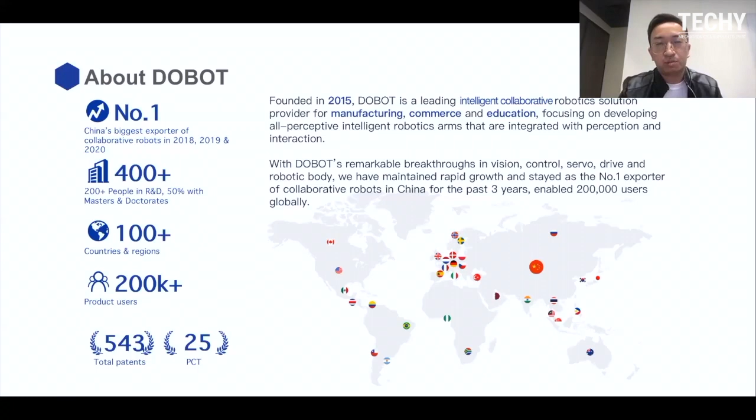Now I'm going to introduce a little bit about Dobot. Dobot was founded in 2015, and Dobot is a leading intelligent collaborative robot solution provider for manufacturing, commerce, and education. We are a team of about 400 employees, 50% of which are dedicated to research and development. In the last 3 years, we have become China's biggest exporter for collaborative robots, and we have sold our robots to over 100 countries and regions, served more than 200,000 users. We value technology and research a lot, and we have total patents of more than 500, and also 25 PCT.

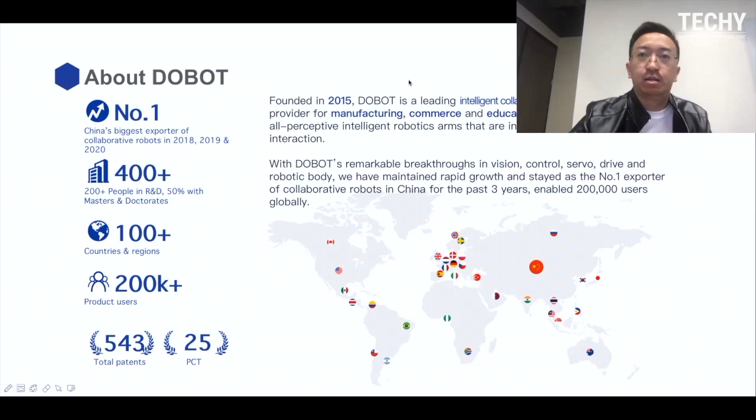Here is the product history of our company.

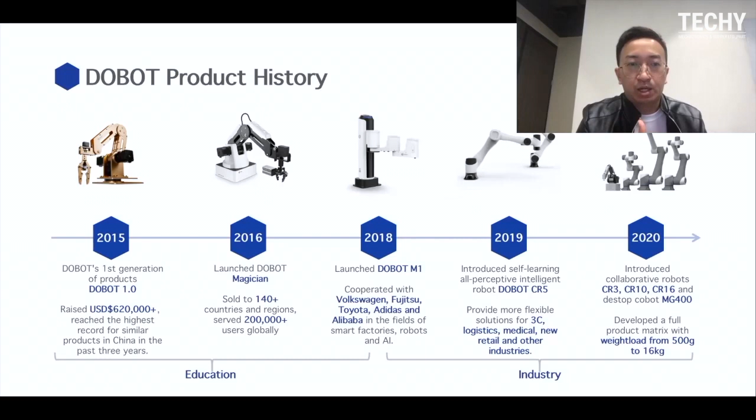In 2015, with the idea of bringing robots to more people, not only in industrial or manufacturing but for applications in other areas as well, we launched our first product, the Dobot 1.0, on Kickstarter, a United States crowdfunding website, and we raised 620,000 US dollars. After that, we began our journey developing more robots. In 2016, we launched our first robot, Dobot Magician, one of our most successful products, sold to over 140 countries around the world.

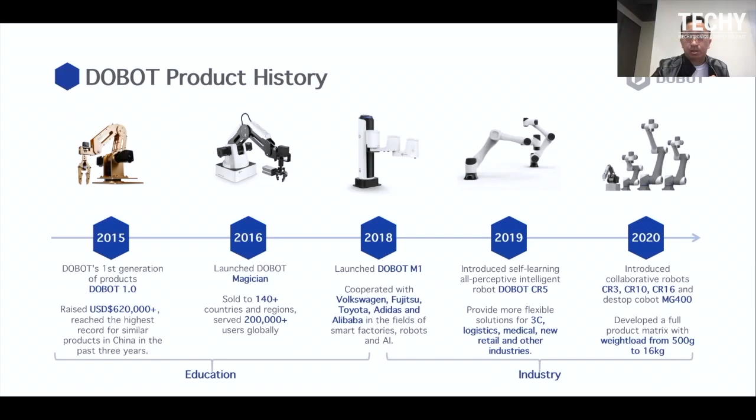After that, our company grew very fast and a lot of people joined. We started to develop more professional collaborative robots. In 2018, we launched the Dobot M1. After that, we had the Dobot CR5 in 2019. Last year we had the Dobot MG400 and also the CR3, CR10, CR16, etc. We also developed the Dobot M1 Pro last year. That's our product history.

In the past few years, some well-known companies have become users of Dobot robots, such as Toyota, Volkswagen, Foxconn, Sony, Samsung, and etc. We developed those robots because there are problems we want to solve for manufacturers. First is the rising competition - automation is almost everywhere today, and in this rising competition we need to further reduce manufacturing cost and stay ahead while improving product quality at the same time.

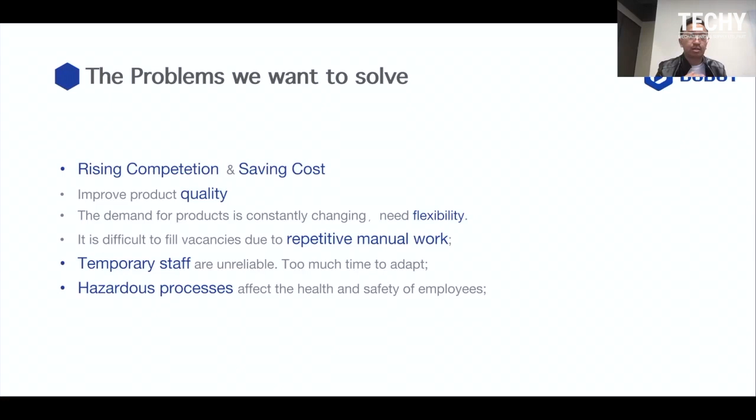The demand for products is constantly changing, and we need a flexible production line to adapt to new products. We also find it's difficult to fill vacancies due to repetitive manual work. We also face this same problem in China for our own factory, because temporary staff change a lot, are very unreliable, and take too much time to adapt. Sometimes the hazardous process also affects the health and safety of employees. Those are the problems we're facing in manufacturing today, and we want a better solution for that.

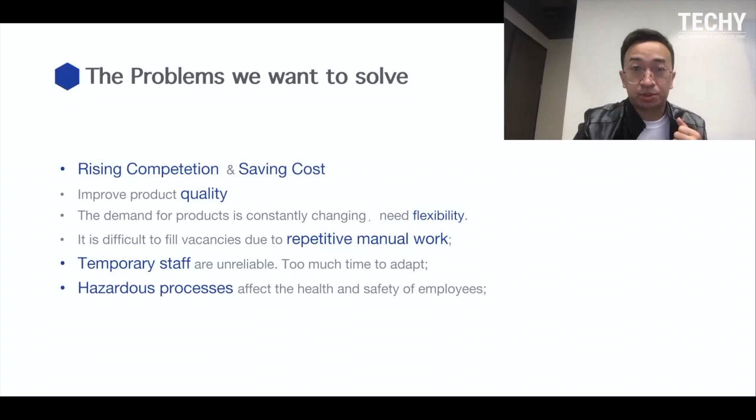We also have some special challenges during these COVID times. The first is rising labor cost, because labor cost is a big part of total industrial operating cost. The automation of industry has become a notable method to counter rising wages and workforce aging. In this case, we need a flexible solution.

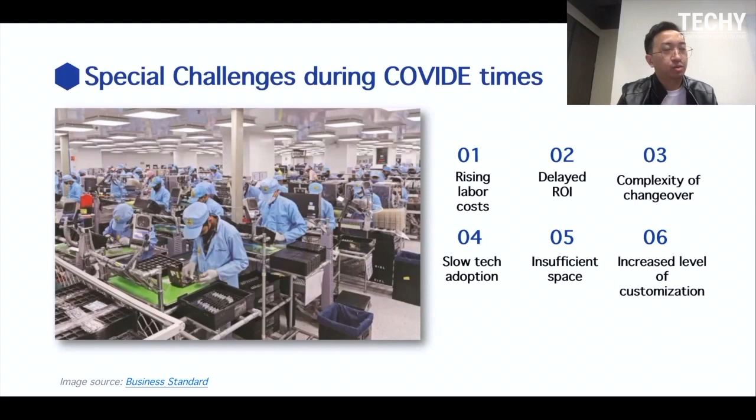That's our robot. We also may have other solutions, like non-standardized or customized machines for special purposes, but you'll find when the product changes, your specialized machine cannot be used for the new production process. But robots have very good flexibility to adapt to the product.

Second is the delayed ROI. In the long term, robots prove to be a significant value-addition by providing several advantages over manual labor in terms of operating cost and productivity. But the initial cost may be a little higher, especially for industrial robots - very high initial cost. But compared to that, the collaborative robot is much cheaper, and the ROI looks much better.

The third one is complexity of changeover. Today, the product changes very quickly. Maybe this month you have one type of product, maybe next month or three months later you need to produce a new type of product, and you need to change the production line for that process. Therefore, fast deployment and changeover automated production line is needed in fast-growing manufacturing companies.

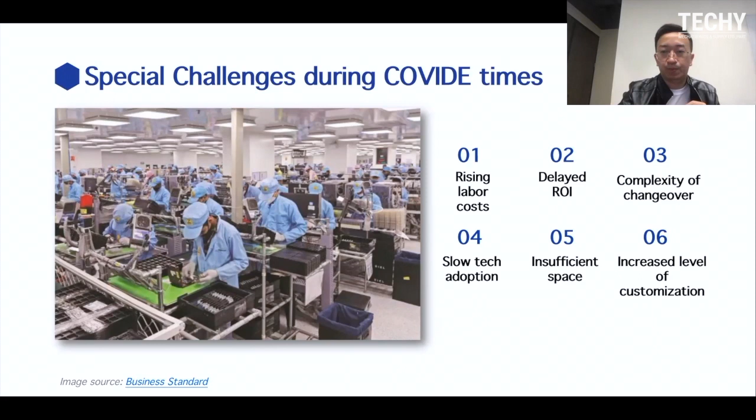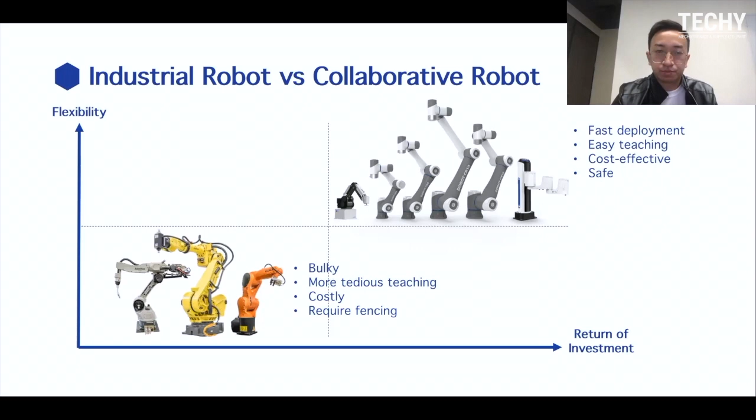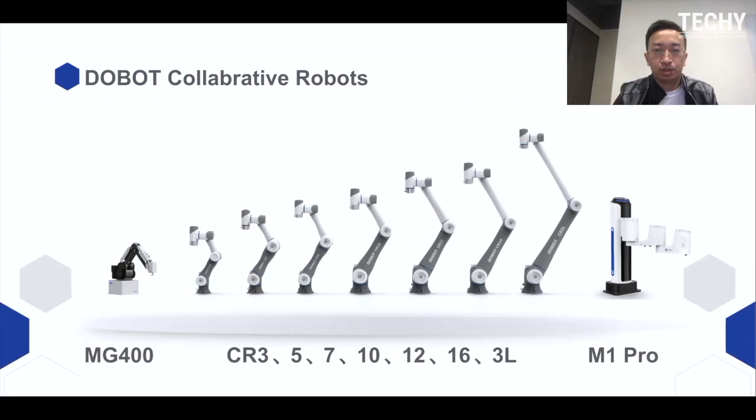Here is our Dobot collaborative robot lineup, from the Dobot MG400 to the CR series and also the M1. Our collaborative robots are designed to satisfy different application scenarios such as screw driving, assembly parts, and machine tending, where lots of human labor is required.

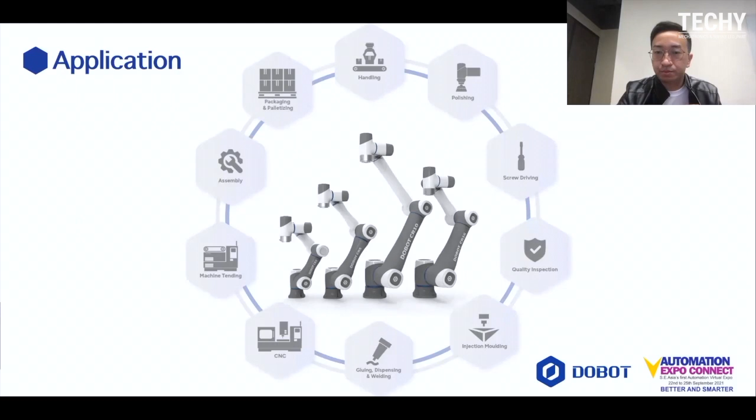So why Dobot? What can we provide to our customers and what value can we offer? I'm going to talk through several points. The first one: we have a product series of different types covering from 0.5 kilo to 16 kilo payload, and we regard safety, ease of use, and quality assurance as the most important product features.

In the past few years, we have been continuously investing in robot technology, such as mechanical design, controller algorithms, and software. We believe we can provide our customers with competitive products to solve customers' problems, improve production efficiency, and save cost. In addition, our partners in automation, such as computer vision and grippers, can make the use of the robots faster and more convenient.

Here are some product series of our robots covering different payloads and work ranges. Some are targeted at small object operation, for example for 3C and electronics companies, and some are designed for applications with heavy payload or big end effectors. We also have a special model like the CR3L, which targets small weight for big range, for example for CNC and other applications. For our customers, you can choose the right one for your specific task to reach the best price and performance ratio.

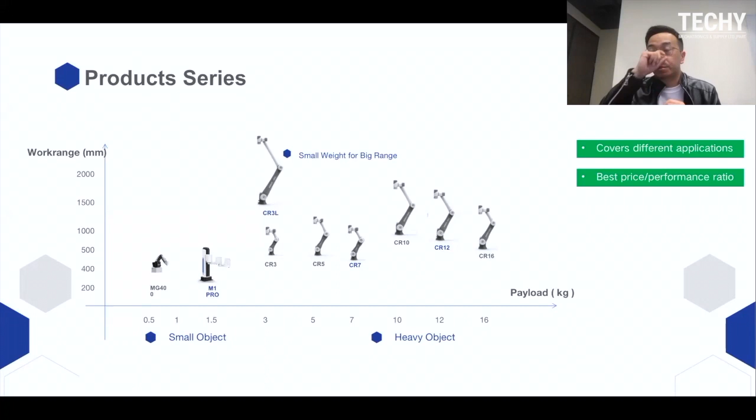Safety is also very important for robots, especially when you want the robot to work side by side with people. At Dobot, we have two advanced technologies for safety. One is called safe skin, the other is called collision detection.

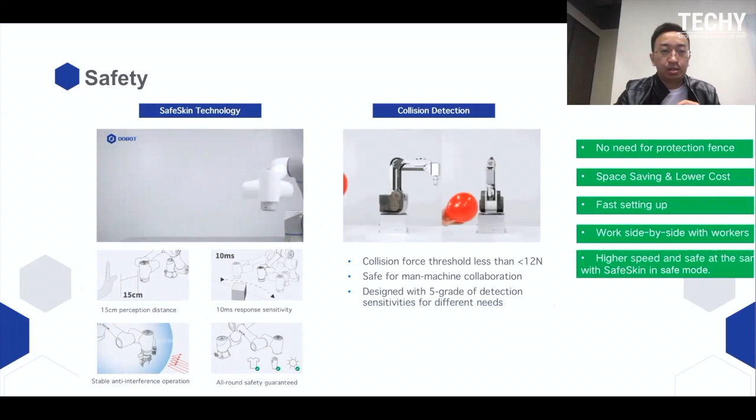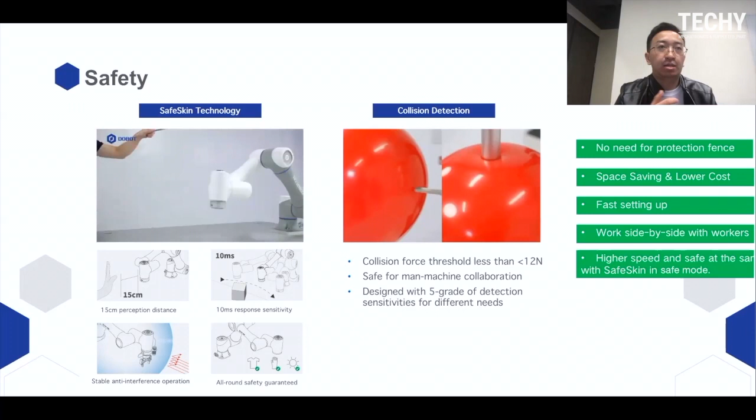The safe skin is a non-contact technology for human detection before the robot touches people, and it can sense there is an obstacle on its trajectory and stop immediately. It has a 15 centimeter perception distance and 10 millisecond response sensitivity, and is stable and anti-interference in operation. It covers the whole body of the robot arm, so no matter which direction you approach, the robot will sense there is something and stop immediately.

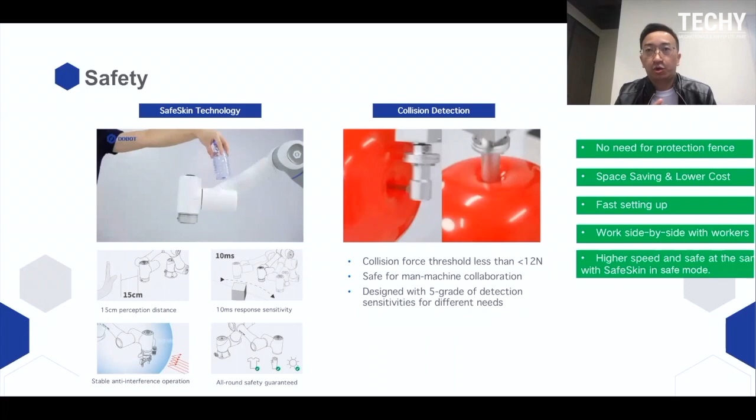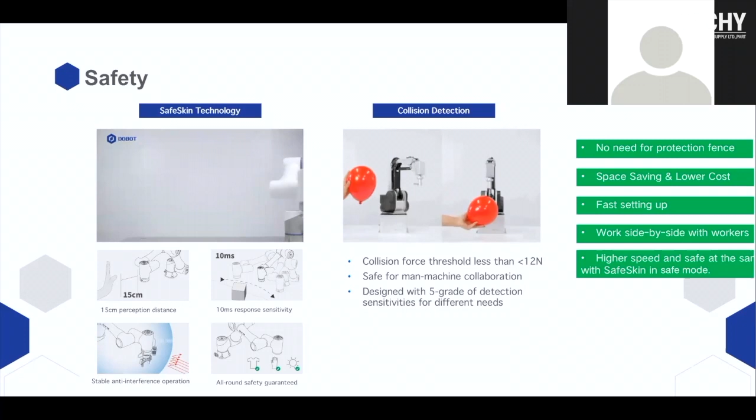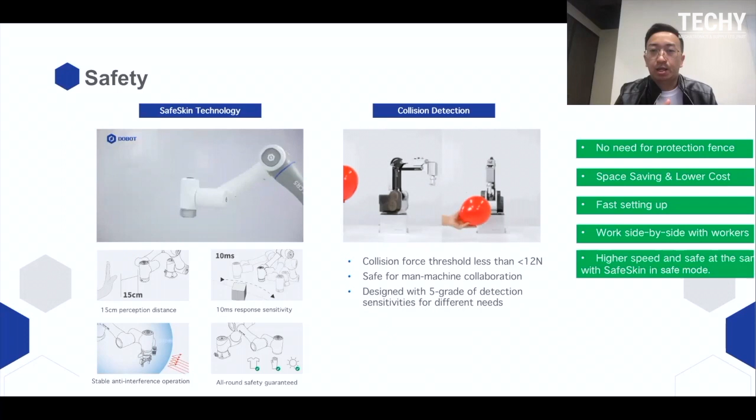We also have collision detection, especially for our small robots, and the collision force threshold is less than 12 Newton, which is very safe for man-machine collaboration. Safety is not only about protecting our workers, but it also means less space requirement for the protection fence, which can lower that part of the cost.

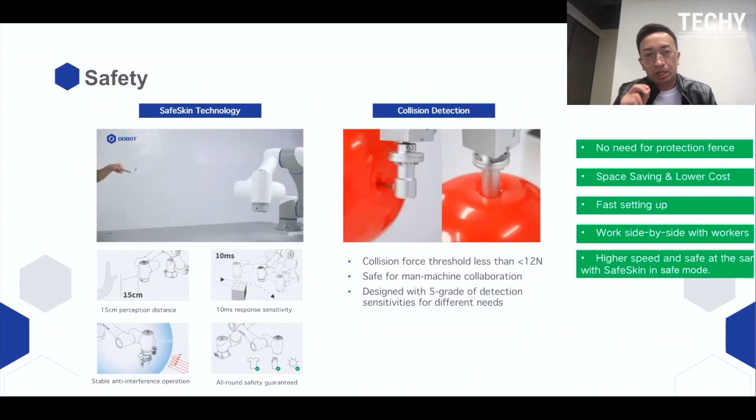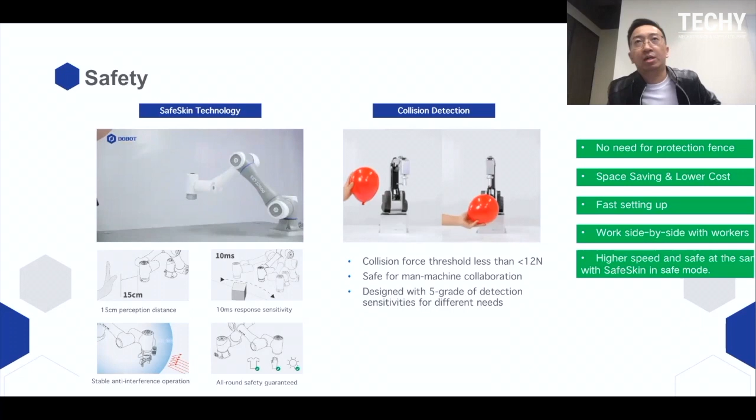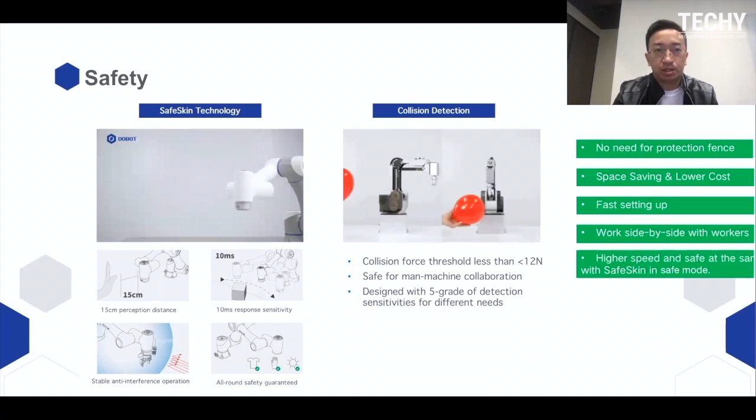With our safe skin technology, the robot can be set up fast, and especially with safe skin, the robot can run at a much faster speed when it's in safe mode. For maybe some other companies with other collision detection technology, when the robot works in safe mode the working speed is reduced to like 50% or 75%, but with safe skin technology we maximize the speed, which also means greater production efficiency.

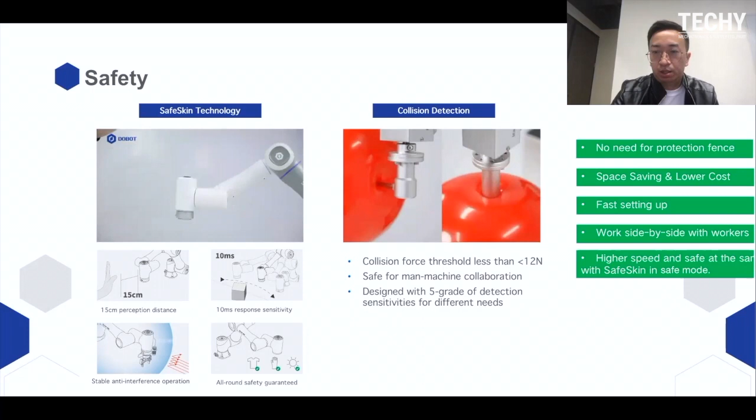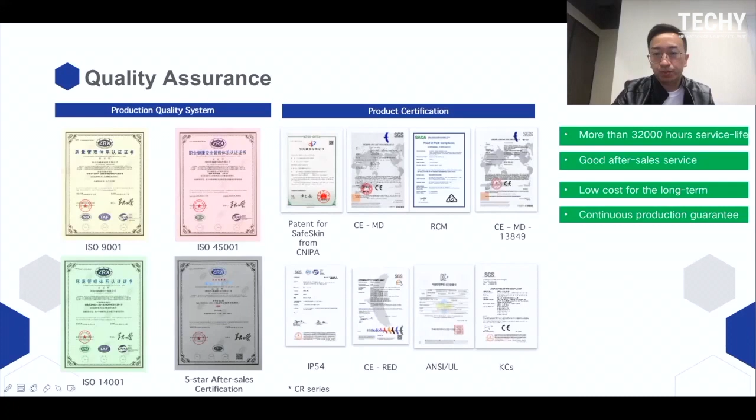And we want to have more people use our robot, so we have spent a lot of time to make the robot easy to use. The first one, we have our Dobot Studio.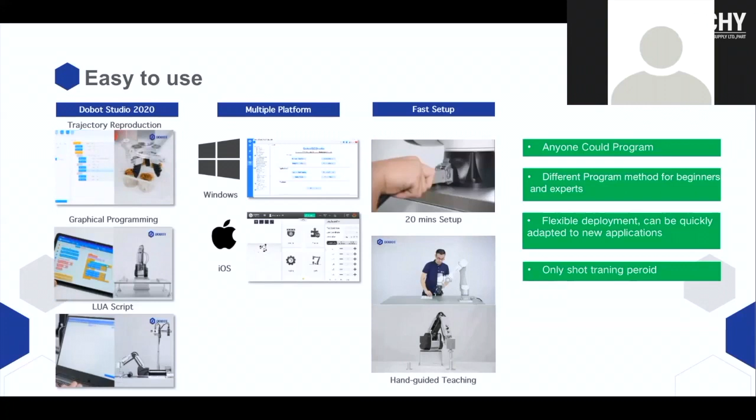We provide 3 methods for programming. The first one is called trajectory reproduction. The second one is graphical programming, which is more like blocks, so you can simply drag them together and program the robot very easily. And we also have the LUA script production program method. Therefore, everyone can program and use the robot very easily.

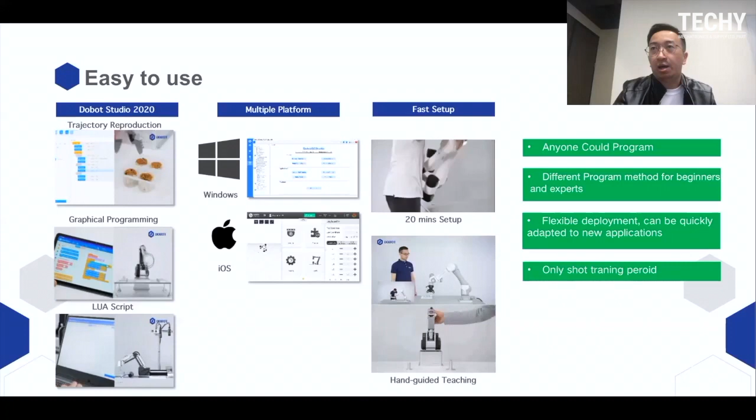We also have different program methods for beginners and experts, and you can use different methods for simple tasks or for very complex ones. So you have different options to use.

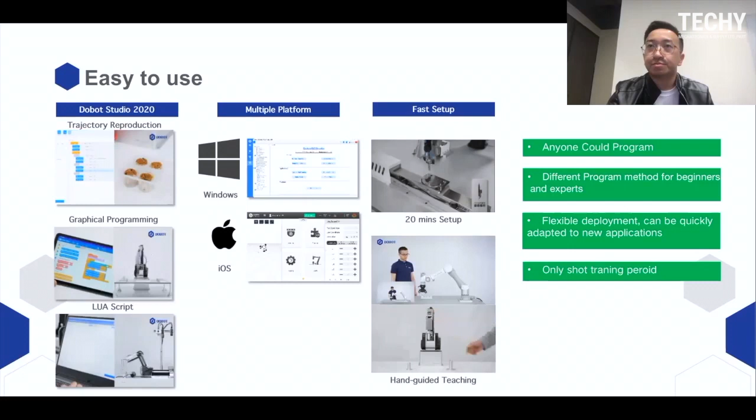We also have software both for Windows and iPad or Android. So for PC or mobile platforms, you can have different options.

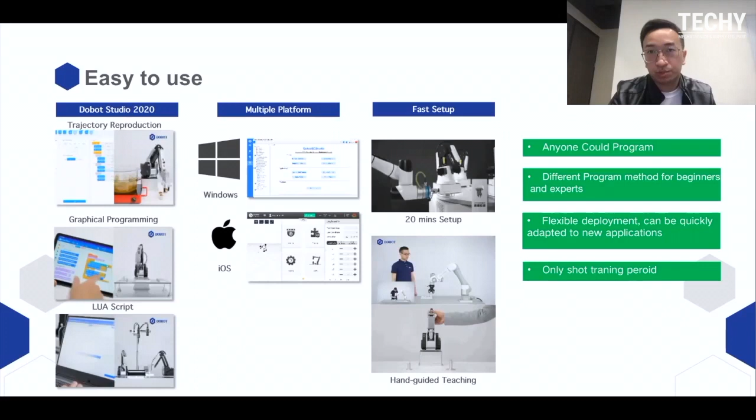Our robots are also very easy to set up. You only need 20 minutes to set up the robot and start to run. And this hand-guided teaching also makes the robot very easy to operate. So all this makes the robot easy to use.

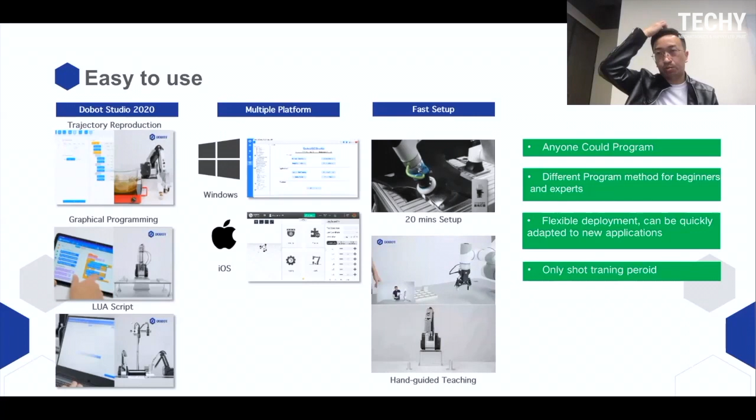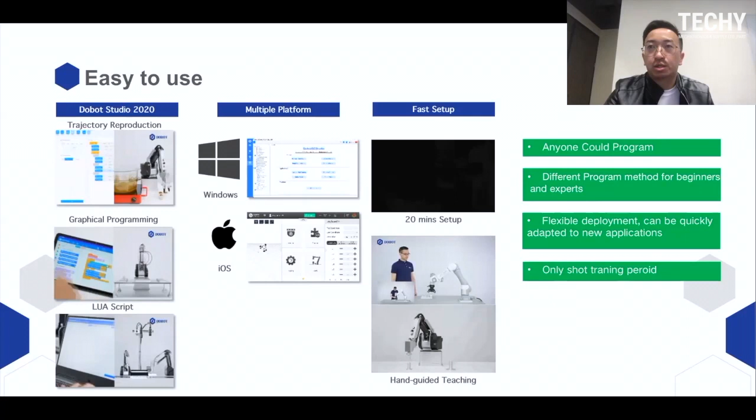We want the robot to have flexible deployment, so it can be quickly adapted to new applications. And for your staff, you need only a short training period, and then you can start to use the robot.

What's new for robots from Dobot? The first one is our Dobot M1 upgrade. For M1 Pro, we upgraded the controller. We have had M1 since 2018, but last year we upgraded to M1 Pro. We didn't change the payload, the maximum range, or the repeatability, but we changed the controller.

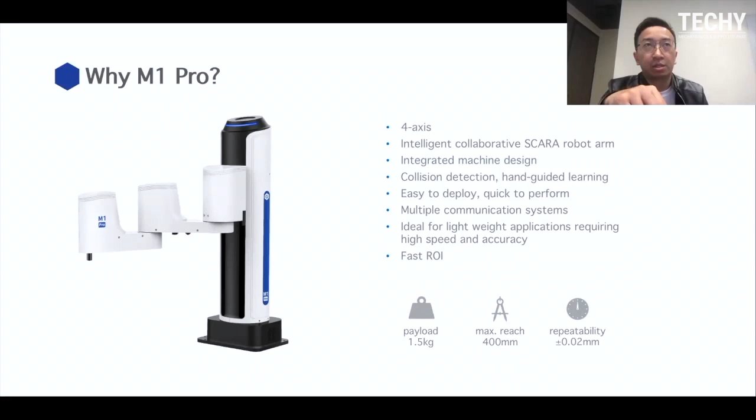So now the Dobot M1 has almost the same controller as the Dobot MG400 and our CR series. So you have the same controller platform, and it's more stable with better performance. We also changed the servo motor of Dobot M1, so it's faster and more stable, especially when the robot is running at lower speed. It's a major change.

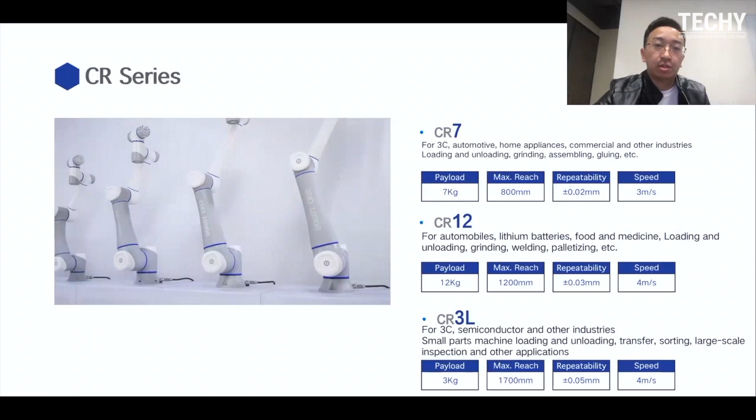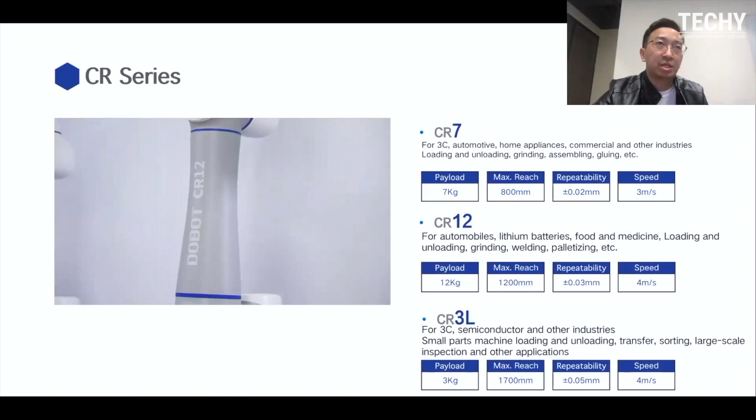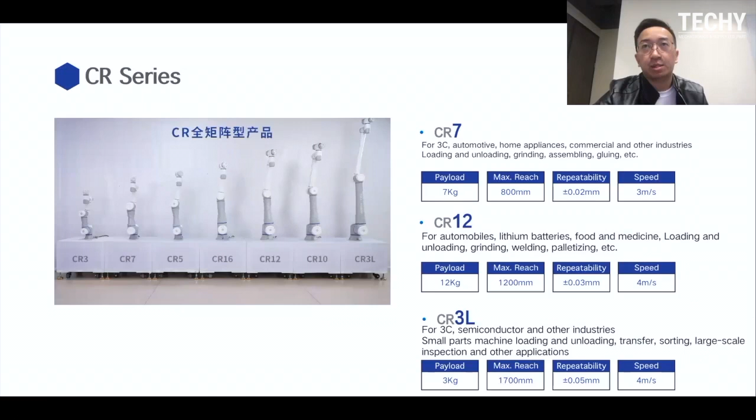This year we also have our CR series upgraded. Last year, in 2019, we had CR5, and afterwards we had CR3, CR10, CR16, and this year we have CR7, CR12, and CR3L. So now you have much more choices for different applications.

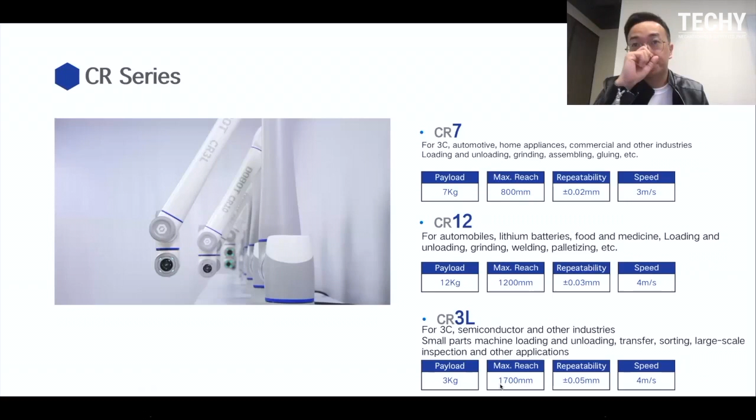For example, for CR7, you have a payload of 7 kilograms and 800 millimeter reach. And for CR3L, you have a 3 kilo payload and over 1700 millimeter reach. You can use this one for small parts, machine loading and unloading, transfer, sorting, and large-scale inspection and other applications.

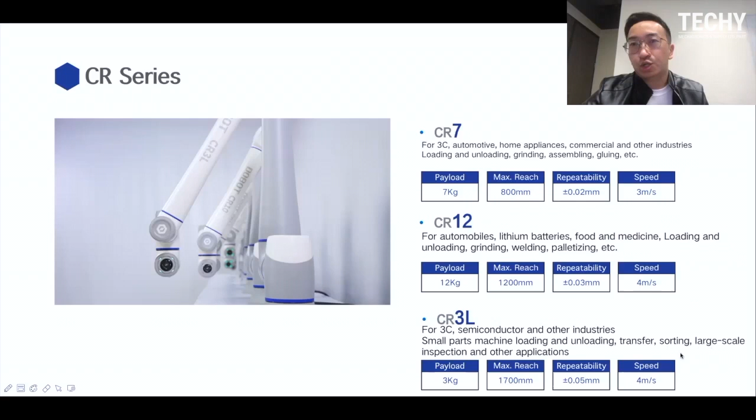Here is my introduction about Dobot and our collaborative robots. For next year, we are going to spend more time developing robots for commerce applications. For example, we have found that nowadays not only manufacturing businesses are using robots, but also some new industries are going to use robots for replacing human labor.

We also have a small robot for education. Yeah, that's our plan for next year.

We are also going to develop some workstations for our current products, MG400 and CR. Maybe we are going to make some screw driving production stations, or for MG400 we have some gluing stations, etc. So with these workstations, we want to make the operation much easier for our customers.